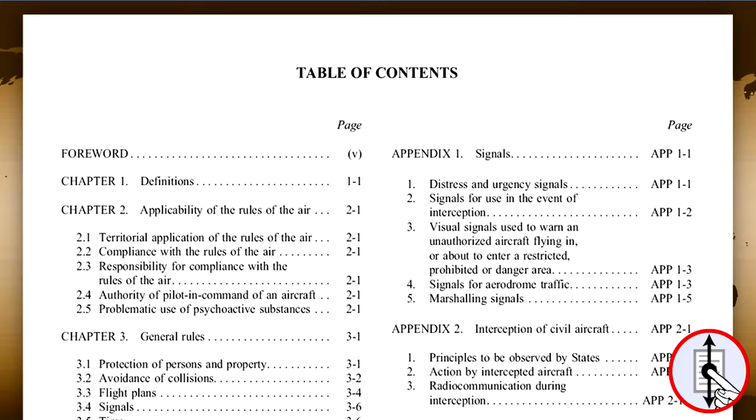Here is the contents page of ICAO Annex 2 Rules of the Air. Scroll through it and take a look at the topics covered.

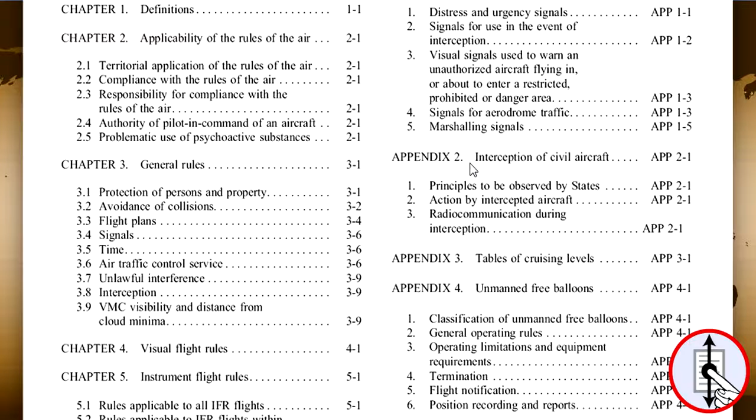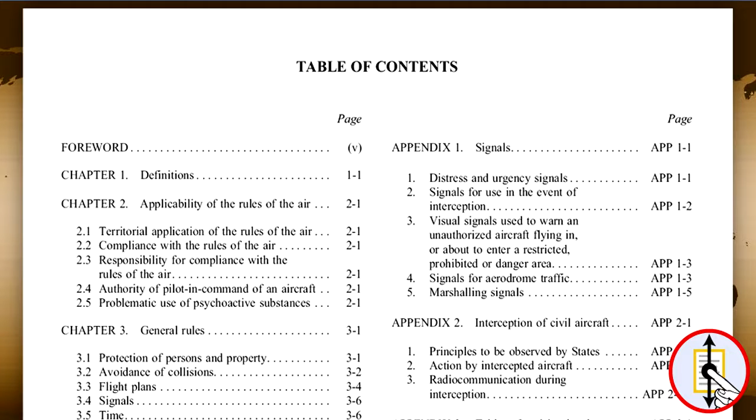First of all, you will see that Chapter 1 contains definitions of words, expressions, and concepts used in Annex 2.